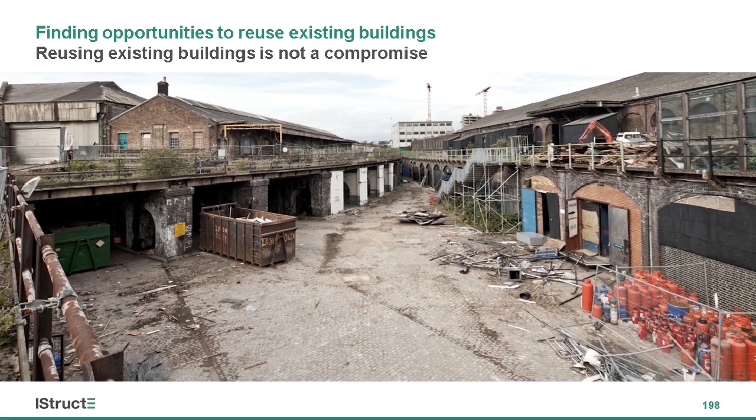And this is a really good example at Coal Drops Yard in London, where largely derelict heritage buildings that you can see here have been radically transformed. The client's vision here was to restore these Victorian warehouses. They were listed, so we needed to preserve their historic character, but also create a dynamic new public space. So it wasn't just about reusing the buildings, but to create something quite new and different.

And a considerable amount of work was required here by the structural engineer. So this involved assessing the existing buildings, and they've now been restored. But also that transformation introduced this new roof structure that peels away from the existing, and a new retail space has been hung from this roof to create this floating space over a public plaza.

And this hopefully illustrates that, in this case, Coal Drops Yard is now the centrepiece of the regeneration of the wider King's Cross area. And the transformation of these existing buildings has now created this vibrant area with restaurants, bars, cafes, public spaces, and people actually go to visit this area. So it's a real placemaking achievement.

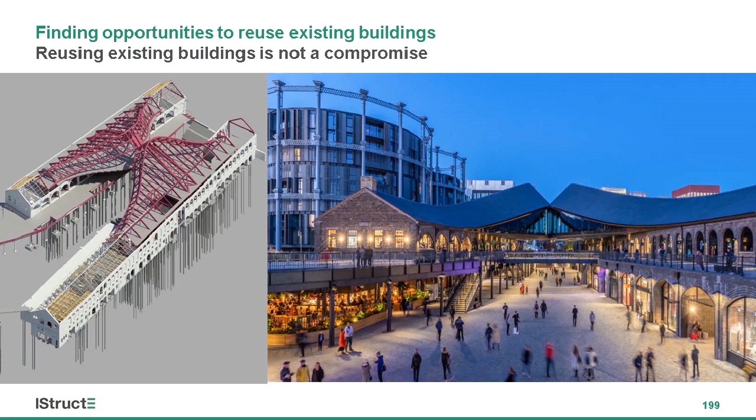So, as engineers, as I said before, we have a vital role to play in influencing our clients and the architects that we work with to reuse and transform existing buildings. And often the decision to retain an existing structure requires some input from the engineer. It can be easy to simply focus on the risks and the problems associated with keeping it, rather than the potential rewards. And it may seem difficult, but it's important that we're able to address these considerations.

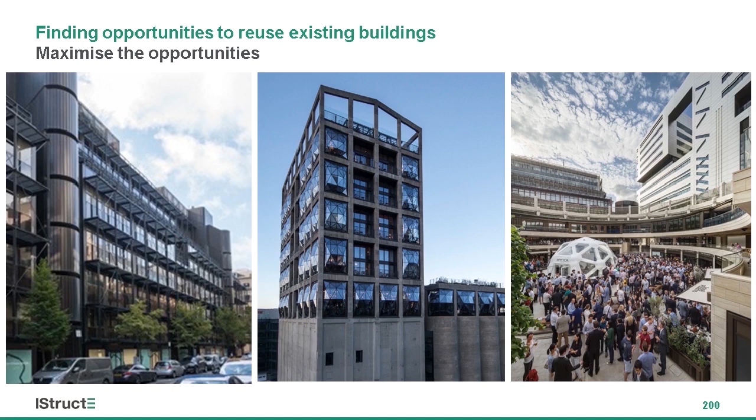Reusing an existing building isn't always the answer, but it's important that we do carry out an informed early assessment, and this can potentially reveal the exciting opportunities that existing buildings can bring. So, what does the client actually want? It's great to hear Margaret talking about the discussions that you can have with the client, and this is where we have that key role.

If your client wants to know what to do with their existing building, the first step is to understand exactly what they want. What are their drivers? Are they unhappy with the existing building? If aspects are inadequate, can it be adapted rather than immediately concluding to rebuild? Are there structural problems and can they be repaired? And does the building layout work? So this is a big one actually that I find.

For example, common challenges include inadequate circulation, insufficient natural light, or limited floor to ceiling heights. But these issues can all be addressed through a multitude of interventions, and it's really important to drill down into the detail because we can help inform a solution that doesn't involve demolition. And as I said, it may not be straightforward, but it's really, really important that we can articulate and explain those potential options and solutions at that early stage. So in addition to understanding your client's issues, it's also important to discuss the bigger picture with them.

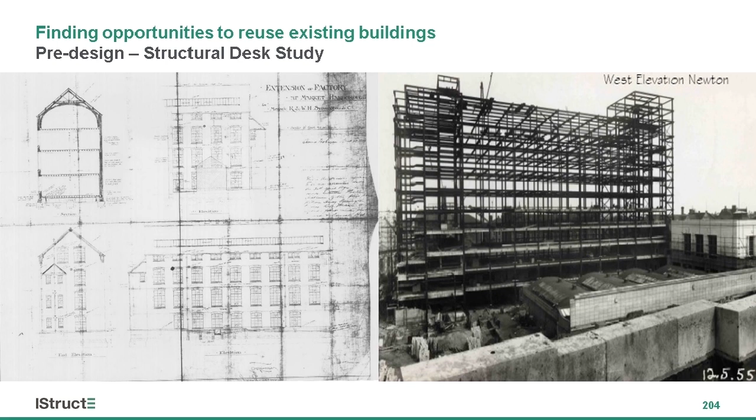So following on from that, it's also important to understand the building's condition. Inspections, opening up, and survey works can help to develop a much better understanding. They can also confirm the accuracy of the desk study that you've already carried out, validate your structural systems, and also identify any defects. And with defects, it's important to not just straight away condemn the building, but understand why they occurred, and ensure that any remedial works are actually effective.

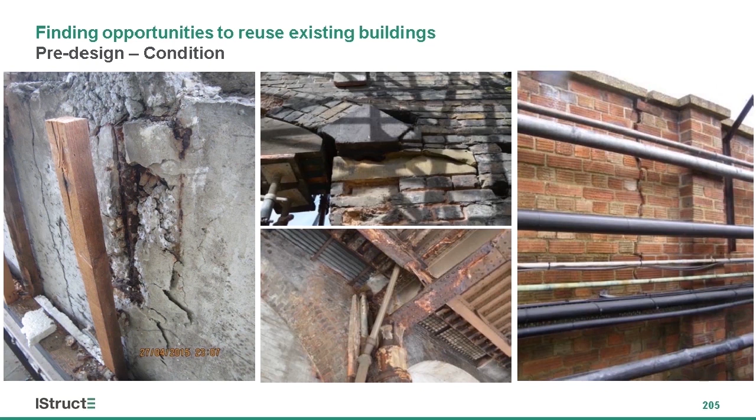So the engineer here has to have the confidence that they understand how the structure works, there is an identifiable load path and stability system, and also that the building doesn't show any signs of structural distress. However, it's not necessary to always carry out extensive calculations with existing buildings, and sometimes the historical performance can actually justify its future performance.

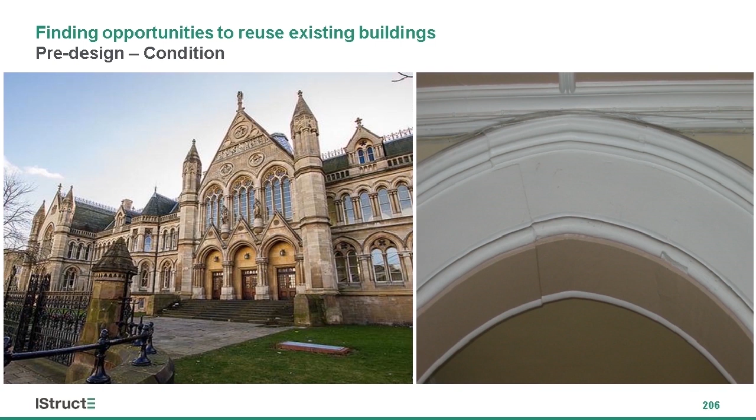Here you can see the listed Arkwright building at Nottingham Trent University, which was built in the 1800s, and previously it had suffered significant historical movement due to settlement. But rather than condemning the existing structure or attempting excessive repair works, we carried out detailed investigations to understand why the building had moved and whether it was continuing to move. And here the design approach accepted that the building may move, but changes of loading, both temporary and permanent, were minimized. And where change was unavoidable, we just locally enhanced and strengthened, but we accepted that the building would continue to move and it needed to be monitored, rather than doing something excessive or demolishing the building.

So the listing is important. Is the building listed? Listed buildings are nationally important, and therefore they have extra legal protection. So the listing recognises that it's special, and it does bring with it controls over alteration, extension and demolition. And it can be perceived sometimes as a hindrance, but what's really important here is for the engineer and the designer to understand the philosophy of conservation. And this involves adopting principles such as minimum intervention, reversibility, and honesty.

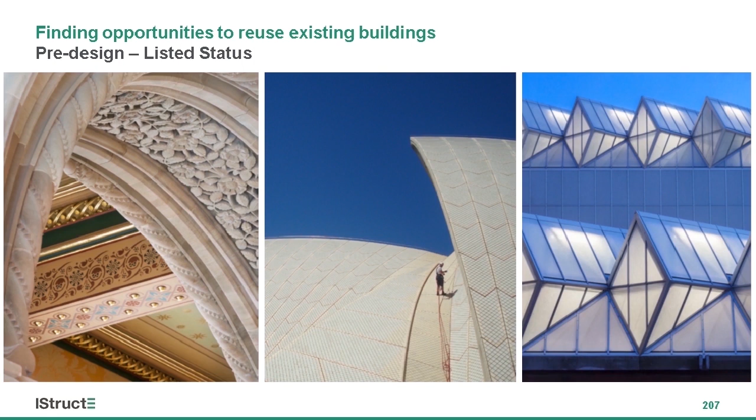And conservation accredited engineers can understand these considerations and apply them to existing listed buildings. So we have a pivotal role to protect and prolong the life of these sorts of historic structures, but it does require the engineer to develop a wider array of skills and knowledge. And it's worth, as I said, reading up about the conservation accredited engineer.

So loading is an important consideration. Natasha talked earlier about the actual floor loading on an existing building. Often the codes would suggest a much higher load than is actually required. So when you are working on an existing building, just think about the loads that it will actually experience and what you need to design for.

Change of use is something that I'm seeing more and more today. And change of use can give a building a new lease of life, particularly as keeping it occupied helps to guarantee its maintenance. It can result in load increase, possibly through new services or additional imposed loading. But unlike interventions, the implications of change of use can be quickly determined at a very early stage. So, for example, there's been a trend to convert offices to residential. And this can be relatively straightforward because there is a reduction in loading.

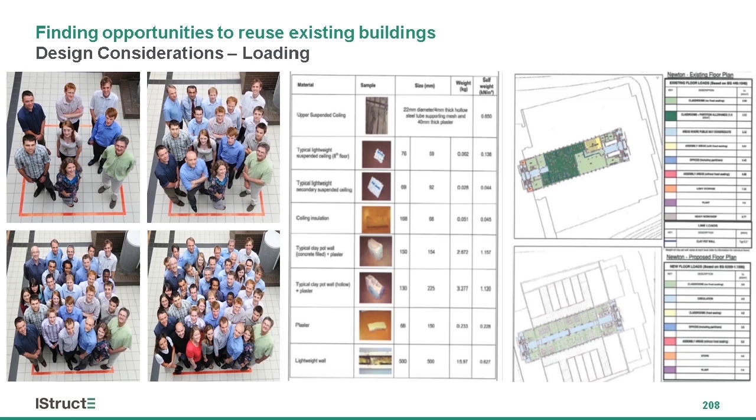Another important thing is trying to compare the existing superimposed dead and imposed loads against the likely applied dead and imposed loads. The comparison that you can see here on the right-hand side really helped to avoid major strengthening works, and we were able to repurpose an existing building.

So floor to ceiling heights, this is another very important consideration, and it should be reviewed as early as you can, because this can also influence the reuse. So for example, offices, they typically require greater heights to accommodate services.

And structurally, it's relatively straightforward, but it's having those early discussions and coordinating that design to maximise those floor-to-ceiling heights. And this transformation, it increased the lettable area by 10%, which significantly increased the rental value, and it didn't require a new build.

A much more radical approach here was taken at the George Green Library at the University of Nottingham. Here the building was to be reused. It was a 1960s building, but the basement, it wouldn't meet modern building regs for headroom, daylight and access. And here the columns have been lowered, so we've transformed the basement into a more usable ground floor. It did require some major temporary works to support the existing structure.

So you can see there on the right, there's a pair of steel channels that were clamped onto the existing columns, and using hydraulic jacks, we gradually transferred all of the load from the building onto the temporary frame. And this process was repeated, and it allowed each of the existing columns to be lengthened, and we created a much more usable level under the building.

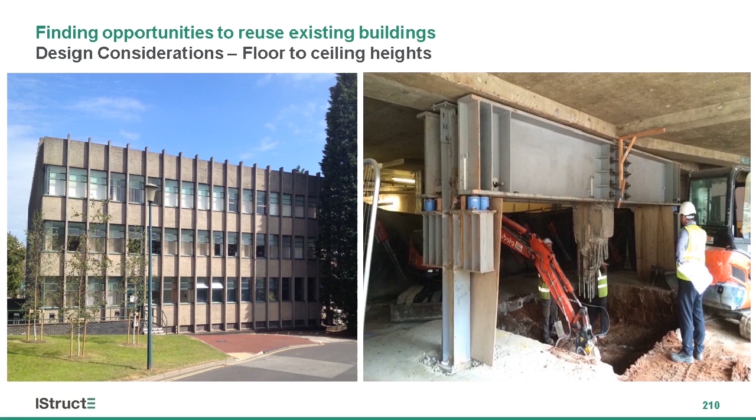So the internal layout should also be reviewed just to ensure that it meets the client's requirements. It can be easy to dismiss the future use of a building on the basis that the existing structure is a constraint, but there are many options available for the structural engineer to transform spaces innovatively and also cost effectively.

This is a really radical transformation of the Museum of Contemporary Art Africa in Cape Town. And it was a grain silo which was previously used to store maize, and it consisted of 42 concrete cylinders that you can see on the top left. But it was disused due to containerized shipping. And rather than demolishing the building, spaces have been carved out of the cellular concrete structure to form 5 floors of galleries and an atrium.

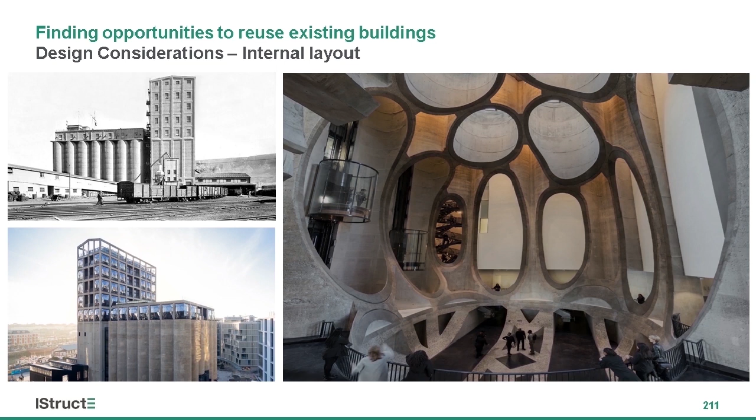And this allows natural daylight into the space, and it's revealed the original intersecting geometries in quite an unexpected way. And here the structural engineering, it's given a historic silo a completely new lease of life by reimagining the interior space, but still maintaining the industrial character.

Although the existing structure can be reused, new services often need to be inserted, but the building shouldn't be treated as a blank canvas for the services distribution, but a starting point should always be to try and coordinate and thread through the original fabric. So this does require a bit more investigation and close coordination with the building services team, but you can generate quite significant cost and program savings.

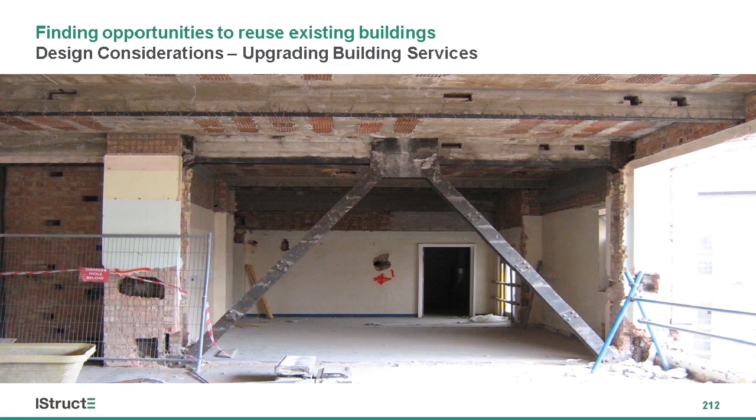So here's an example from a 1960s building, and it had a previous life as a chemistry department. After we opened up, we found that there were drainage channels in the lab floors and penetrations through the existing beams, and these were then used to distribute all of the services, which maximise the floor-to-ceiling heights.

You've heard earlier about reusing foundations, and this is becoming an important consideration, particularly in inner city sites. So this can be due to congestion in the ground from generations of development, and therefore installing new foundations can be quite difficult and also costly. But reusing foundations can yield significant cost savings and also increase program certainty due to the reduced risk.

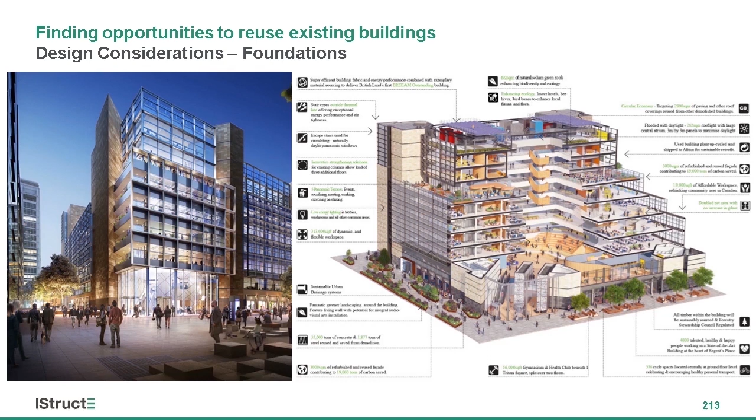So we need to try to understand the capacity of existing foundations, as you heard earlier, and even if there is an increase in load, it may still be possible to reuse them. Here you can see One Triton Square in London, which was designed in the 90s, and we were asked to update the building for the latest work styles, and it involved introducing 3 extra floors, but we were able to retain the existing superstructure and substructure.

Many old buildings have poor environmental performance, often suffering from summer overheating and significant heat loss in the winter. So the envelope is an important consideration. The existing cladding, this can be removed entirely, stripping back to the existing structure and replacing it with a new system. However, the weight of the new cladding needs to be considered to either match the weight of the original, or it's important to determine the extent of strengthening that's required.

Here you can see the development of the Arup office in London, which involves stripping 2 existing 1950s buildings back to the bare superstructure, and it had a new cladding wrap to create a single office. An innovative approach was adopted here, which incorporated all of the ventilation distribution within the facade, and this helped to maximise the floor-to-ceiling height.

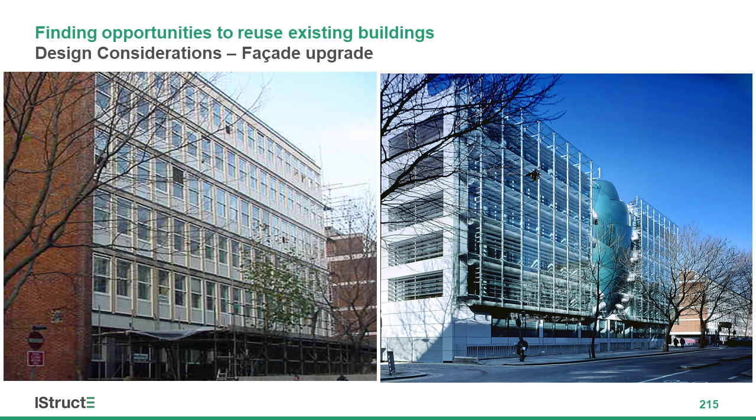Phasing can be an important consideration to understand how the works can be carried out. For example, can the building remain occupied with phased construction? Here you can see the George Green Library at the University of Nottingham, and this was a design competition where one of the client's drivers was to keep the existing facility operational whilst providing a state-of-the-art building. The phasing and decant strategy we developed here on the left-hand side avoided needing temporary accommodation and kept the facility open throughout.

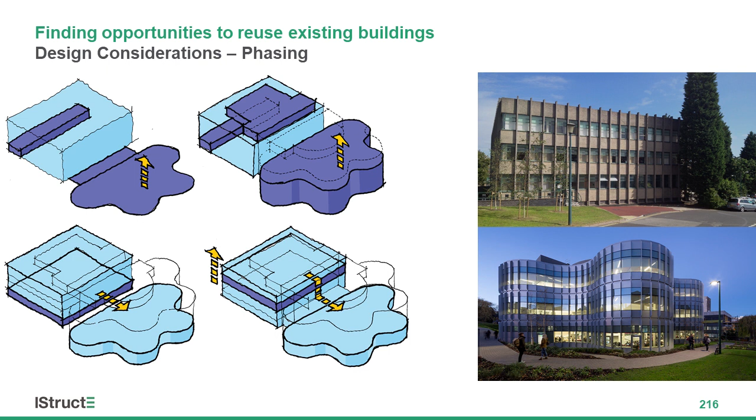Temporary work should also be considered. The Newton Tower at Nottingham Trent University was a building with lots of cellular spaces and dark corridors. So the proposal here was to open up the lower levels and remove the solid walls at the base, which was supporting 9 stories of stone facade and also stabilising the tower.

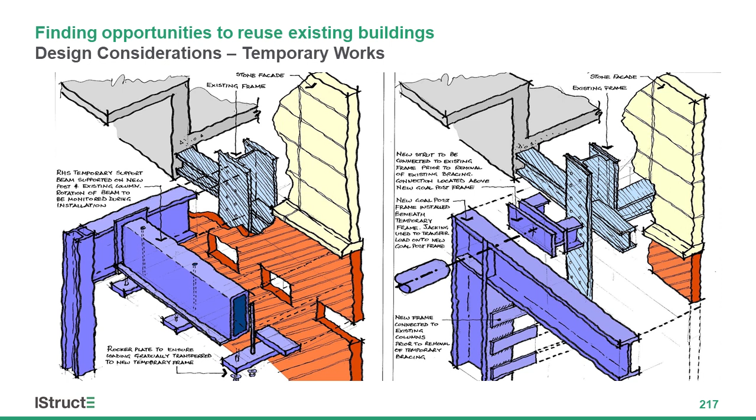Here you can see some of my sketches which show how we thought about how the construction could be planned so that the stone could be supported, the tower stabilised, and new steel goalpost frames installed, which would help to open up the space. And here you can see the construction photos.

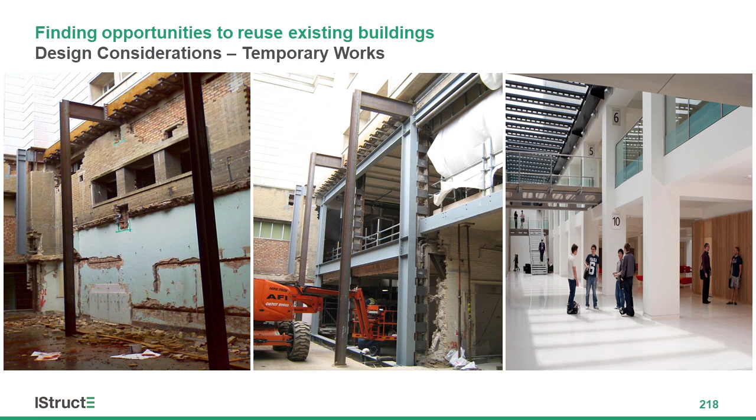So imagination is needed at the early feasibility stages to be able to identify the potential within an existing building. And there are so many missed opportunities. So transforming and reusing existing buildings can offer many advantages over new build, including being more cost effective for clients, and also it can create characterful places and help to preserve the heritage value for future communities.

And as structural engineers, we should be aware of these benefits and be able to confidently discuss them with our clients, as it may be possible to justify the case for reuse over new build.

Thank you, Steve. Thank you. And sorry to cut you off there at the end. I mean, absolute wealth of knowledge.